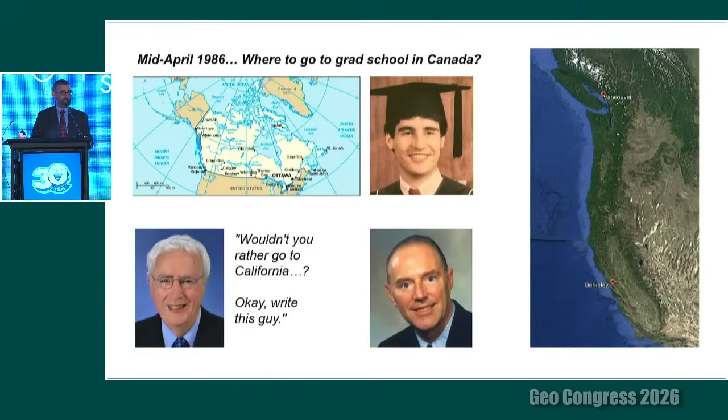He was a very inspiring teacher, and I was very thrilled to be able to start my PhD studies with him. Of course, his unfortunate passing meant that I was not able to finish my studies with him. But at the same time, I know that Professor Seed, through those 25 years of work with Ed, had a great influence on Ed's thinking and approach to life. And in the last 32 years, Ed has had a tremendous influence on me. So I think, at least indirectly, Professor Seed has influenced my career throughout my lifetime. And I'm very thankful for the opportunity to give this lecture in his name.

So with that, we'll get back to the talk. We're going to look at deformation modeling, in the context of risk analyses for dams. If we look at risk modeling for water or tailings dams around the world, you find a wide range in the complexity and maturity of the practices. In the US, we have pretty well-established guidance for water dams. Internationally, our guidance for tailings dams is more general. And if you look around the world in industry segments, there's a wide range from fairly semi-quantitative all through very rigorous frameworks. So we have to improve our practices in all these different ways.

Now, in any of these cases, if you're looking at a dam of significant consequence, we will end up doing nonlinear dynamic analyses, or NDAs, for the seismic part of the problem. The quality of that work depends on the site characterization, where we get our properties, our choice of input ground motions, which is the loading, the numerical methods and the constitutive models, that's the software we're going to use, and then how we use the software, the protocols for the numerical analysis and calibration of constitutive models. All of that depends on the expertise of the analyst and their resources, the amount of time they have to do their work, and the quality of the review processes.

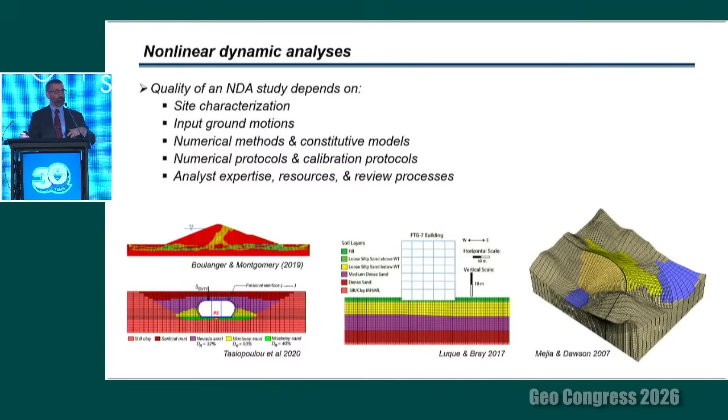We take those estimated responses, and we feed them into the risk analysis, and we have to track the uncertainties. So the uncertainties, we often break these down into two categories: the epistemic, or the reducible, in principle, uncertainties, and the aleatory, or irreducible, uncertainties.

And these are the uncertainties that we will generally evaluate through logic and event trees as part of a quantitative risk analysis, or a QRA, or at least parametrically to evaluate the significance of these uncertainties on performance.

But we also have to keep our eye out for errors. These errors fall in two categories. One category we could call ontological errors, where we've used inappropriate methodologies, relationships, or input models, and that's produced a bias that can throw us off quite substantially. Then there are human errors, the blunders, the bookkeeping, which are very easy to make with these complex analyses. It's the ontological and human errors we're trying to minimize through our QA and QC efforts.

In our experience, minimizing these errors is as important to the success of a project as tracking the aleatory and epistemic uncertainties. So you really have to track these, and we're going to talk about both.

In putting this talk together, my objective is to share a few lessons we have learned and the associated recommendations for improving our practice. These lessons and recommendations are targeted at everyone involved in the work, from the analyst through the managers, the regulators, the review boards, to the owners. So everyone plays a role in this.

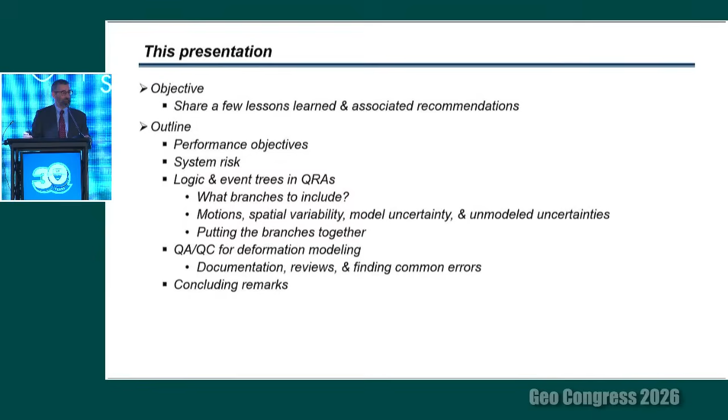So let's start first with some high-level comments and performance objectives. Now, performance objectives, we're always going to be concerned with life safety, but we're also going to be looking at economic impacts, operations, environmental, community, and reputational impacts, and these can all be very important for our owners or our clients.

One of the lessons from doing this work is that it's a really good idea to periodically revisit those performance criteria with your client or owner. The reason is the objectives aren't something you fix and leave. They depend on your costs and benefits, and they're going to change as you learn more about how the system is behaving. As you learn about the nature of the problem and the cost to achieve certain performance, revisiting with your client about what their real objectives are can help inform a more efficient execution of the risk study.

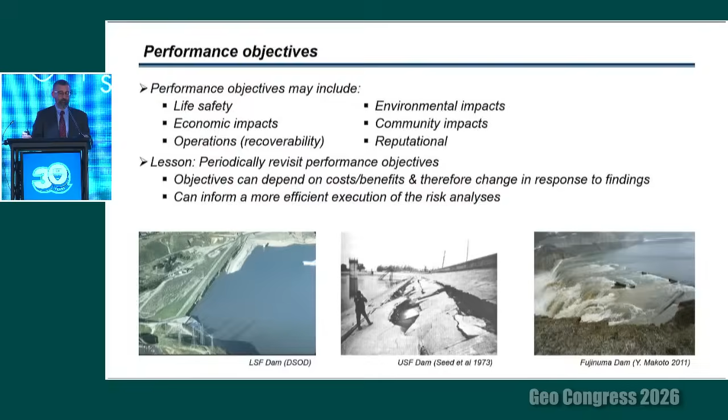In addition, you've got to always be thinking about this as a system risk, not just a seismic problem. When you look at the system, you need to think about the contributions to your risk from operational, hydrologic, and seismic loading. And you need to understand the interdependency of the components—how the embankment, the tower, the gates, the outlets, and the spillway interact and influence each other.

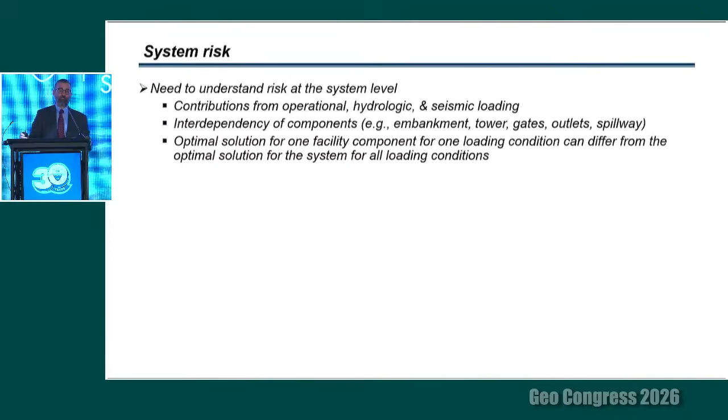The key takeaway here is realizing that the optimal solution for one component of the facility, for one of the loading conditions, is not necessarily going to be the optimal solution for the system to handle all the loading conditions. So you want to look at the system. There are a lot of examples of this.

A good one was the Army Corps' recent modification at Isabella Dam. In the end, having to deal with operational, hydrologic, and seismic loading issues, they ended up modifying both dams with raises and constructing a whole new spillway. The fix you arrive at is different than if you tried to fix any one component on its own.

So the lesson from these projects is that when you're doing a seismic study and you identify a deficiency, don't jump to designing a fix. Pause and re-examine operational and hydrologic risks, and make sure you know what your whole system is doing before you start spending money on further engineering studies.

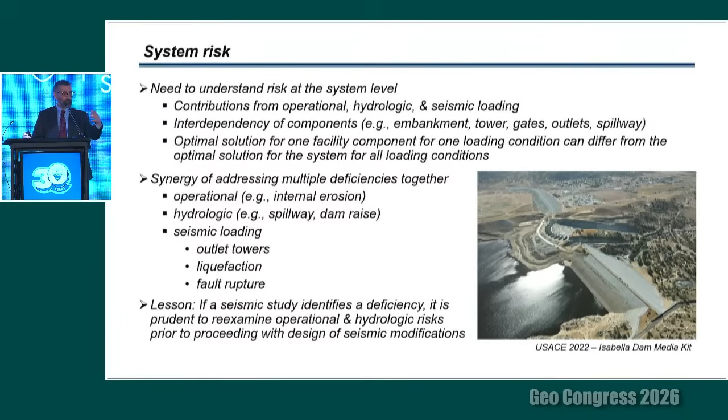So with those, we'll dive down now into logic and event trees for the QRAs. What branches are you going to include?

In particular, we're going to focus our talk on deformations, because it's deformations that we have to propagate down through the other branches for the failure modes, such as overtopping, cracking, internal erosion, concentrated leak erosion, damage to embedded structures, intervention, etc. So we're going to have to track the deformations and pass them down through the system.

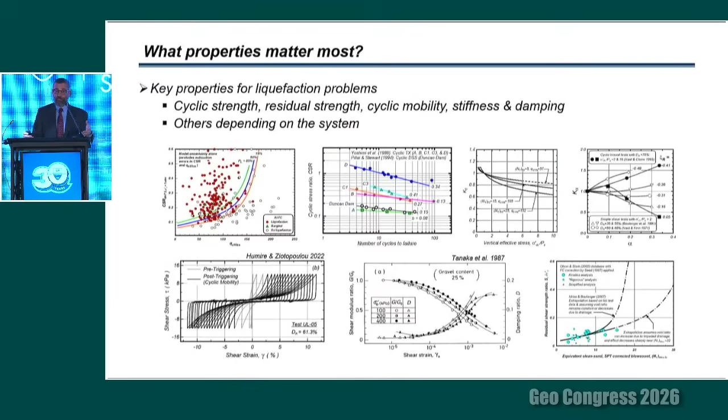Now, when we're looking at this, we're going to have to track the uncertainties, so we represent those in the risk analysis. And if we're looking at liquefaction, the question is, what are the key properties? Well, usually it's going to include cyclic strength, residual strength, cyclic mobility, stiffness, and damping. They're good candidates. It can be other things like reconsolidation strains or other aspects depending on the problem.

And that leads to candidates for your event tree, and you start putting these in. You've got ground motions. We often get our properties from penetration resistances, so you'll have uncertainty in those. And then those go into estimates for cyclic strength, residual strength, cyclic mobility, reconsolidation, etc. We have our stiffness, shear wave velocity, permeabilities, the numerical model, and then other factors.

And we're leaving a whole bunch of other factors uncovered. These include things like spatial coherence of the motion, drained strengths of the other materials in the embankment, cracking, localizations, mesh effects, 3D effects if you're only doing 2D models, the modeling procedures. So in fact, there's a lot of uncertainties, and the problem quickly gets intractable. So what we're really trying to do is identify the key ones, keep this a little simpler.

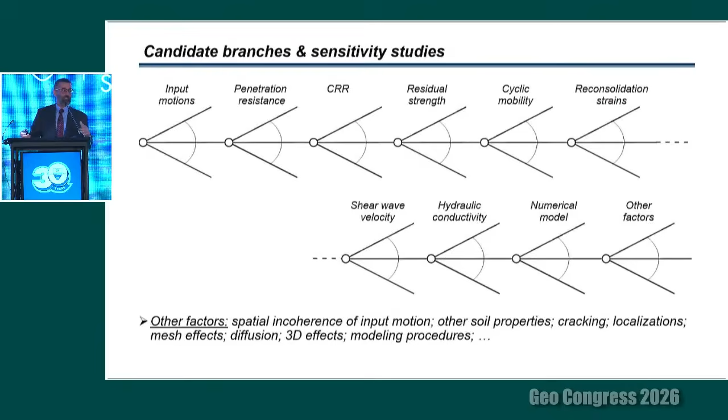And what you can get is at a certain level of shaking, you might trigger an instability, a large or essentially uncontrolled deformation. And we're going to have to treat those unstable cases separately from the stable ones. So you might track the fraction unstable and then have to have a model to predict deformations for the stable cases. So both of these are very important.

Time limits, we're going to focus only on the stable cases as an illustration of one of the things we have to deal with.

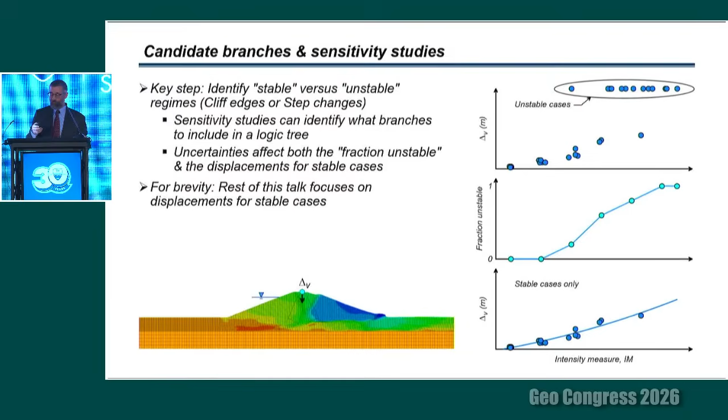Okay, so we're going to do this. Imagine that you've got a stable system, you've done the sensitivity, you know it's going to stay stable, but you do a sparse tree. And you'll see sparse trees in practice, where maybe you just do ground motions, maybe you look at penetration resistance, and maybe another property.

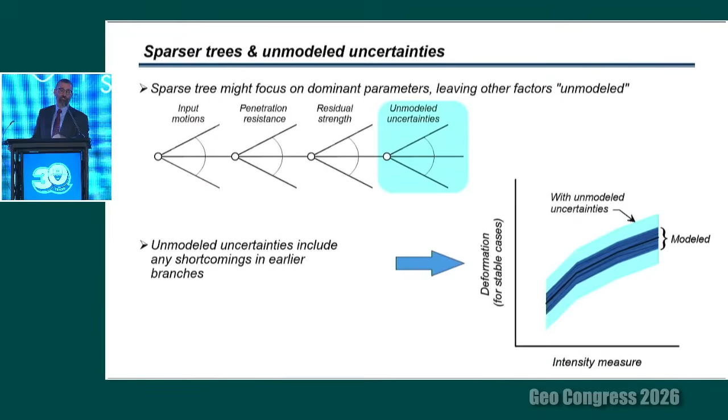And what that means is, schematically, you'll have an estimate of deformation versus intensity measure, and you've modeled some variability. The variability might not be that large. There's all those things we didn't model, the unmodeled uncertainties, and those unmodeled uncertainties can be large. They include all the things we talked about and the shortcomings in the earlier branches. If you add the unmodeled uncertainties, you're going to have greater variability, and that's going to result in greater risk. So that propagates down the line.

So maybe you do a little bit more work, you add some more parameters, you investigate them as part of this event tree, and you're going to have some unmodeled uncertainties at the end, but there'll be fewer of them.

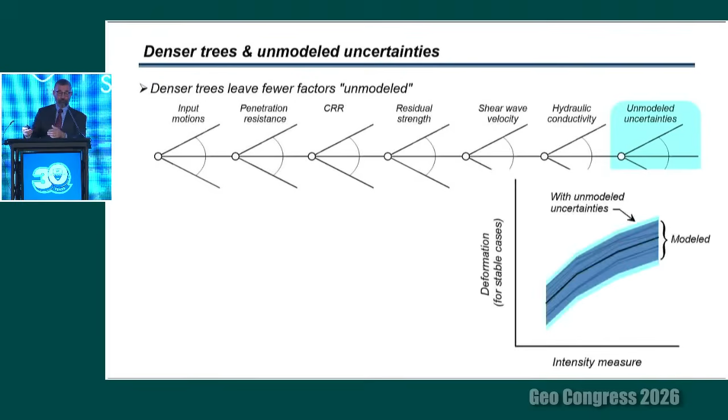That means if you look at your deformations, you'll have modeled greater variability. You have less unmodeled, which means when you add it, it doesn't widen you as much. But you're in an odd situation where if someone does additional work, they have more variability and greater risk, and you never really want to be in that situation. So we'd like to think about how you can estimate and account for unmodeled uncertainties.

Even if you're using sparse trees with different levels of rigor, what I'm going to do is walk through some of the key sources of uncertainty, get rough estimates of their contribution to the variability, then pull them back together at the end and talk about how we can make this more reasonable, even when using sparse trees.

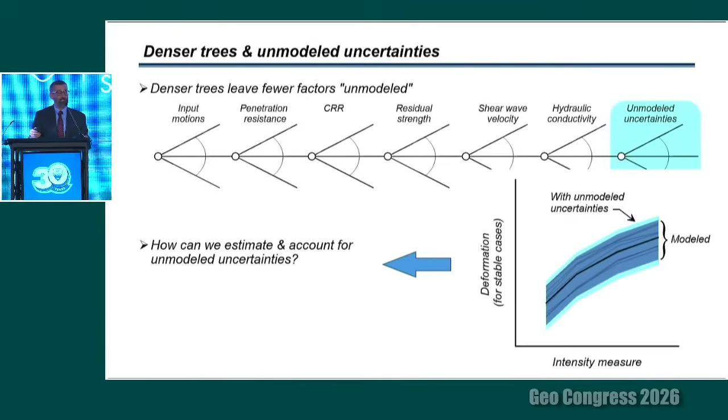Let's start with one of the big ones: earthquake acceleration time histories. The variability in dam deformations you get from just the ground motions depends on the dam, on what you're looking at, crest settlement or toe settlement, on how you pick the time histories, how you scale them, and how you modify them. The uncertainty in the mean response depends on how many of those motions you use, so there are a lot of different uncertainties to put together.

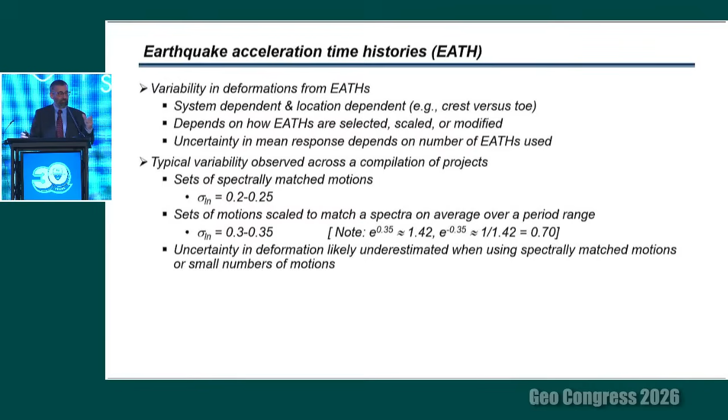If I go back and compile a set of projects performed by various people using generally good practices, sets of tightly spectrally matched motions give a standard deviation in log units of about 0.2 to 0.25. If instead they used sets of motions scaled to match a spectra on average, but where individual spectra include some variability, you get a higher standard deviation in displacements, maybe 0.3 to 0.35.

Recall these are in log units, so if you took the exponential of, say, 0.35, you'd get a factor of 1.42. This means that if you had a mean estimate of the displacement, then plus one standard deviation or minus one standard deviation just means multiply that by 1.42 or divide by 1.42.

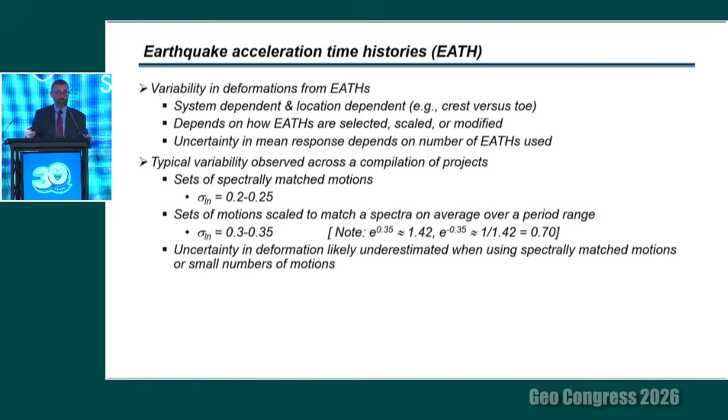The uncertainty in these deformations is therefore likely underestimated when using spectrally matched motions, which we can deal with, but just recognize that. Another big source of uncertainty is spatial variability in natural or constructed deposits, and you get a handle on this using various numerical analyses.

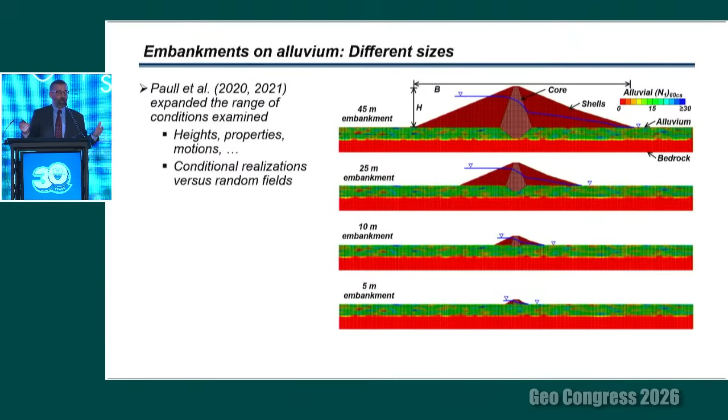This is an example of some work with Jack Montgomery a few years ago. You look at the response of a dam where you model stochastic variability in the properties, then turn around and model it with uniform properties based on some equivalent representative percentile, and compare them. That work was expanded by Nick Paull, where we used different height embankments, a wider range of properties, motions, etc. This figure is just one example of that kind of work.

Now if you change the scale of fluctuation to 60 meters, what embankment is small or big changes, and you have to deal with that. But this does lead to some simple rules of thumb that I'll point out from this slide.

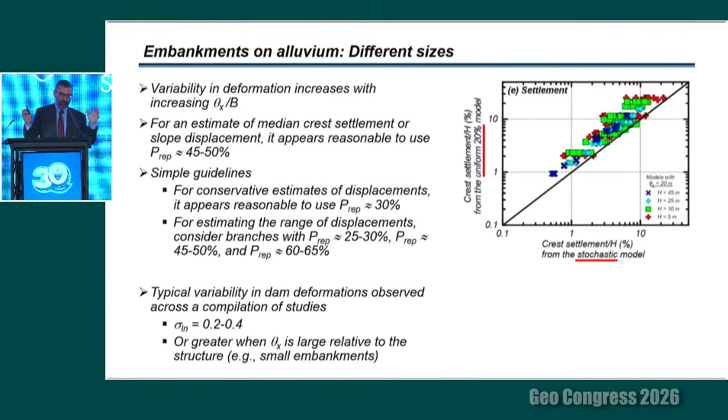If you go back and compile these types of studies, what you tend to see, typical values, is that the variability in displacements from spatial variability gives you a standard deviation of about 0.2 to 0.4. It can get larger if you have really small structures, small levees with big scales of fluctuation. That's a special case, but for dams we're usually looking at something like this range.

So these numbers start looking familiar, and we're going to add a couple more. The next one is model uncertainty. This term refers to just the numerical analysis model, the constitutive model, and the numerical platform. No model's perfect, right? Some are useful. So what's just the error due to picking between different platforms?

This shows that when people have done this, it's a good thing to do in practice, because it's not hard to swap out the two constitutive models, and it gives you a sense of how much it affects your results. When people have done this, typically you'll see standard deviations between them on the order of 0.2 to 0.3.

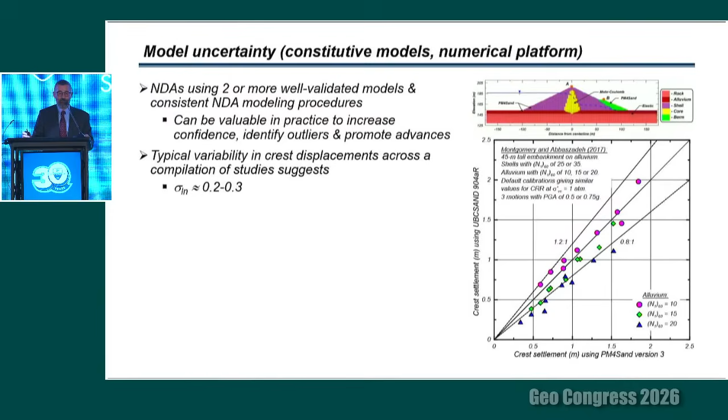Okay, so now, what have we left unmodeled? Well, that long list we talked about. We're not going to go through all of these other than to say we leave a lot of uncertainties on the table, and they're going to depend on the individual structure. One of the bullets is the applicability of a correlation for a challenging soil, a gravelly soil, a clayey sand. The more unusual your soil, the more uncertainty you're going to have.

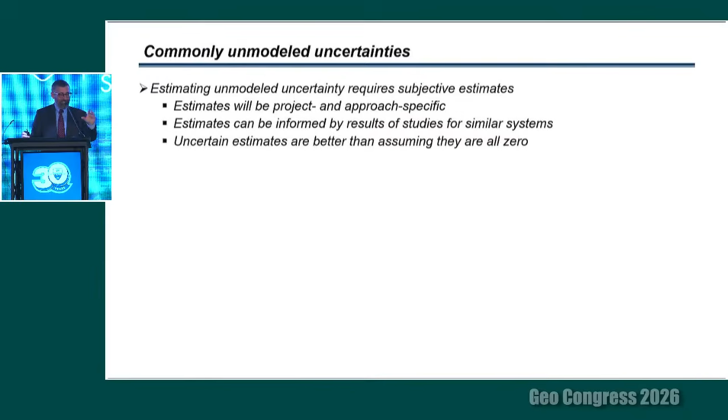3D effects might not be large for one dam, but might be more significant for another dam, so they depend on the facility. But they're not zero, so we're going to try to estimate these. It's going to require some subjectivity, and it's going to depend on the project. You can be informed by results of other people's studies, but I want to emphasize that an uncertain estimate of these is better than assuming they are zero. In fact, estimating them as zero is probably the worst estimate you could make. So we're not going to do that.

For discussion purposes, these are subjective estimates made for an embankment dam, with low, medium, and high standard deviations. The first bullet is the model uncertainty we just talked about, say 0.2 to 0.3. The other commonly unmodeled uncertainties are that big list we just went through, say 0.15 to 0.35. If you added those together, because most times we're not checking models, so those are all going to be unmodeled, you get something like 0.25 to 0.45.

I have to point out the way we're adding these is the usual square root of sum of the squares, which assumes these things are independent and uncorrelated, and that's not true. They will be correlated to some degree, and that will add some additional uncertainty. But it's still better to do anything other than zero. So we're somewhere in the range of 0.25 to 0.45.

Now we can pull all these pieces back together. As we pull them together, the first point to emphasize again is that you have to get the total uncertainty to be realistic, to propagate through the rest of the event tree, because all the other failure modes depend on those deformations. So we have to get realistic uncertainty to move through overtopping, piping, damage to structures, etc. If you use a sparse tree, you're going to underestimate the total uncertainty, and you are going to underestimate risk.

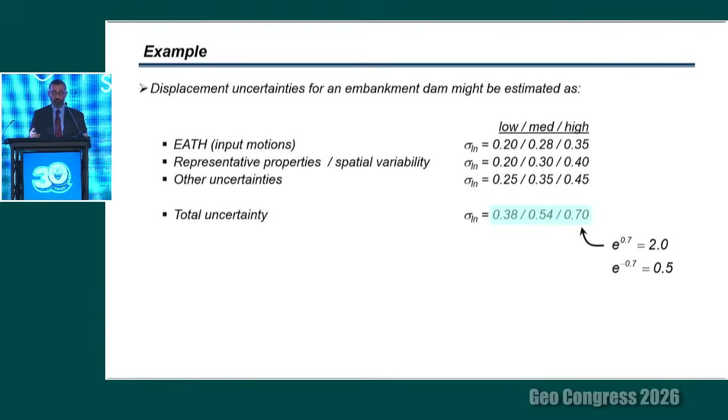If you take those typical numbers we talked about, all those unmodeled uncertainties can be large, and you haven't done the work, so you don't know what they are, so you've got to be cautious. You have uncertainty in the uncertainties. So you should use something a little on the high end, maybe 0.6. If you add that, you get a total uncertainty of, say, 0.66, and now we're close to that 0.7 we talked about. That starts to make a lot of sense.

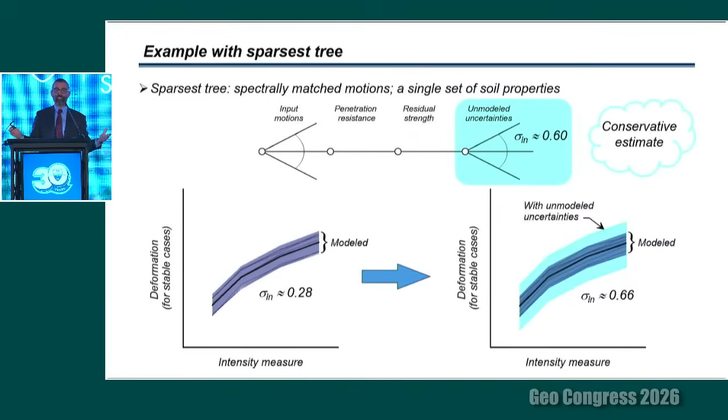So if you see anyone doing sparse trees getting something like 0.28, no one's that good, right? So you have to allow for some uncertainty that you've left on the table.

Now, if you do better work and dive in and examine more parameters, you're going to have more modeled uncertainty, like on the left, but you'll also have less unmodeled uncertainty. When you add the unmodeled uncertainty in this case, your total uncertainty can actually come down. Probably the bigger benefit is that you'll have better confidence in your understanding of the system and where the mean answer is—that's probably your best benefit. But you also get to a more reasonable place where doing more work should, if anything, reward you with bringing down your variability or uncertainty.

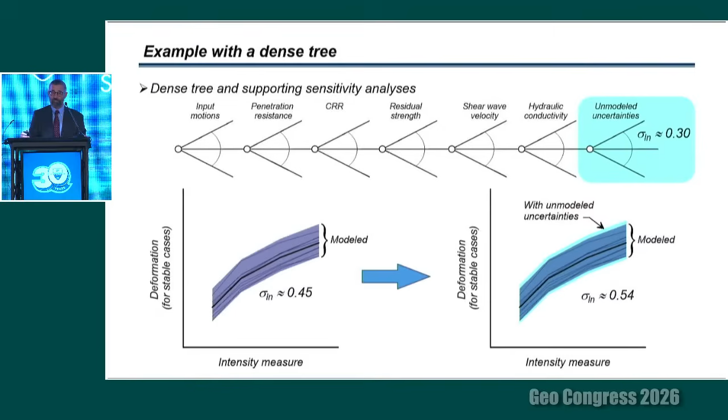So just wrapping that part up: a key step is to identify your stable versus unstable regimes, and you have to have done that through either sensitivity studies or pretty detailed branches. We'll handle those separately from stable cases. What we were talking about was estimating displacements for stable cases. You have to get the total uncertainty to be realistic, to get the risk reasonable.

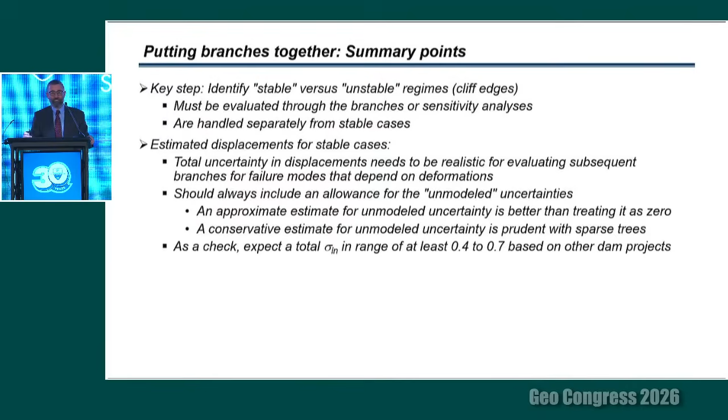I would argue that you should always include an allowance for unmodeled uncertainties. An approximate estimate for unmodeled uncertainty is better than estimating at zero, and a conservative estimate is prudent if you're trying to get away with sparse trees—that'll help us avoid rewarding people for doing the least amount of work. As a check, if you're the reviewer or the owner, your total sigma in displacements should be on the order of 0.4 to 0.7, based on dam projects where people have done the work. If you see anything smaller than that, they're missing something. Again, no one's that good.

Okay, so that was QRA analyses.

Now what we want to talk about is minimizing ontological and human errors. These are a concern because they're a very common problem in our profession.

The first problem is the unreviewable report. This is where the consultant writes the report and says, we did these FLAC models, here's the deformed shape, the answer is 3 meters. You can't review that, you can't tell if it's behaving reasonably or not. It's an unreviewable report. So you push back and say we need some figures, some intermediate results, show us these things. That leads to the second problem: the supplemental materials come back and now you start spotting significant errors. If you identify errors this late in the process and redo the work, you've screwed your budget and your schedule, and no one's happy. So this is not a good situation.

A third problem is variability in practices. This is where you get very different results from an analysis when you change your consultant. This happens if one consultant evaluates the issues and says you have a problem, you need to fix it, then the owner hires a second consultant to do the fix, and they build their own numerical model to design the fix and get wildly different answers. Now the nature of the problem and the nature of the fix has changed. You have to resolve that before you can go forward. Those problems are usually due to ontological or human errors, and you have to sort them out—again, no one's happy.

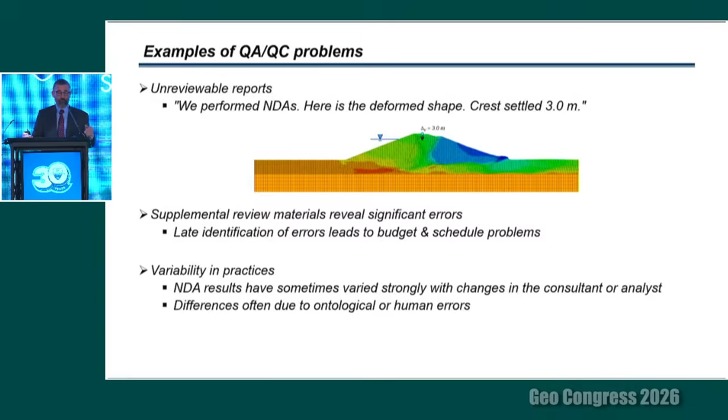So fixing these things early on is in everyone's interest. Mike Beaty and I wrote a paper about this about a decade ago, called a reviewer's checklist. We went through 12 things we were interested in looking at if you're going to be able to review a report. I'm not going to go through all of them. There's two things I want to focus on: comments on what we want to see for calibration of constitutive models, and what kind of results we want included for a particular baseline analysis case.

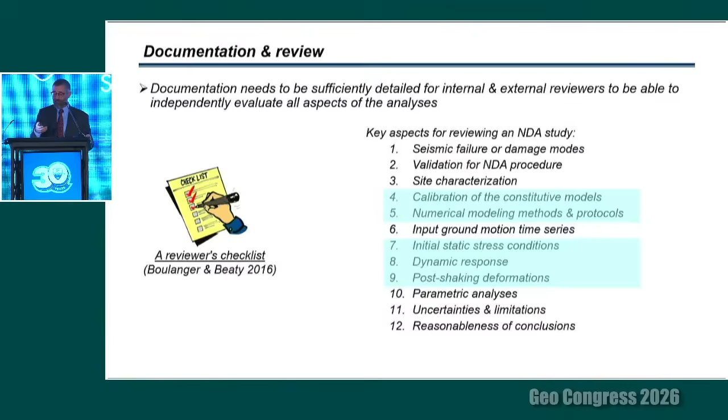We summarize those as a recommended standard set of plots we'd like to see. People often ask why we want all these plots—the reason is common errors will usually pop up on one or more of these figures, you just need to see them. If you get an engineering report from a firm that does really good work, you get all these figures and there's no problems, often because the analyst has already seen the figure and any obvious errors have been spotted and fixed. When you get a report and the figures aren't there, you can't independently check that everything's behaving well, and you aren't necessarily sure the analyst has actually checked everything. So you need to see the figures in the documentation.

As we go through this, I want to point out the reviewer doesn't have to explain what's wrong—the reviewer only needs to spot that something looks odd. If you spot something odd, it's the consultant's job to explain or fix it. You just have to learn how to spot odd.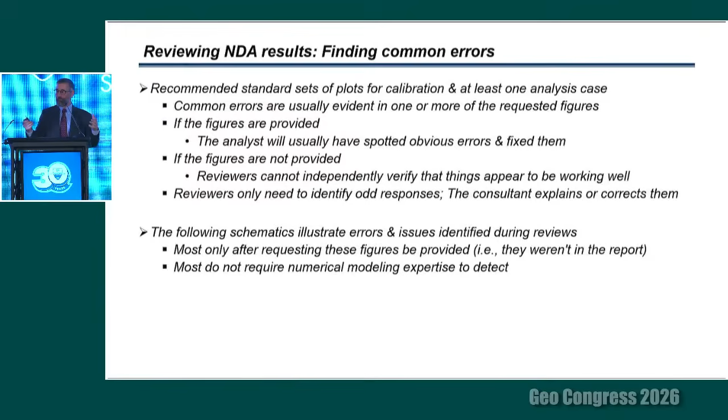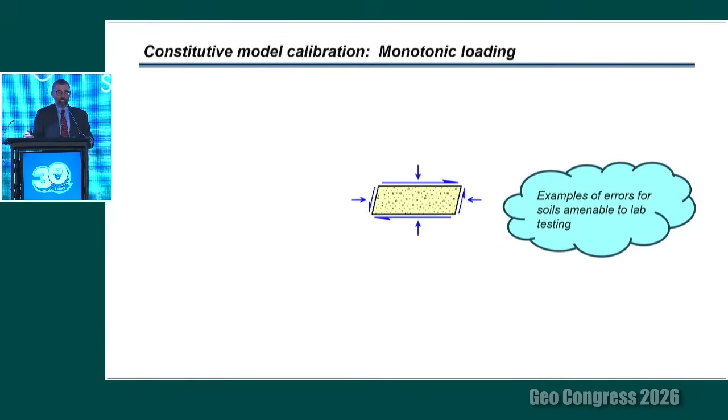We'll start with some figures on calibration of constitutive models. Suppose we have soils where we can do lab tests, like clayey silts and silty clays. The first thing people like to do is calibrate to the lab test, showing a calibration against a monotonic lab test. Turns out lab moduli are often lower than in situ moduli by factors as high as 2 or 3, so you'll underestimate the stiffness, and that affects your dynamic response.

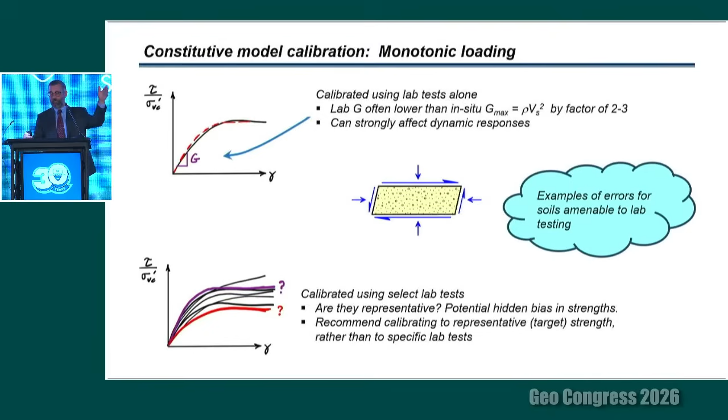So yeah, that's a flag. They show you a calibration to individual tests, but they don't show you whether the test is representative of the whole data set. So you've got to see where the other data are. Oh, they picked the lowest one, or they picked a very optimistic one. So how did you pick these tests?

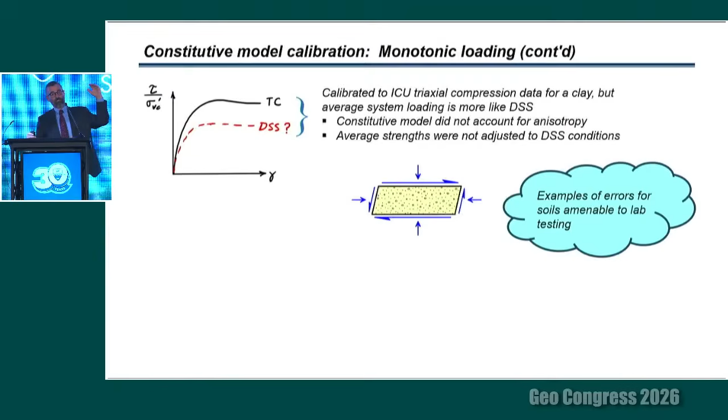Or they calibrate it to triaxial data, but it's a site where the dominant loading condition is more like simple shear. Well, if you're in a clay, silt, or sedimentary deposit, simple shear strengths are often about two-thirds of triaxial strengths. And many constitutive models, when calibrated to triaxial, will not predict the correct simple shear strength. They don't do anisotropy well. So you either get the consultant to show you the anisotropic modeling and prove it works, or they end up having to adjust the triaxial to simple shear and calibrate to that.

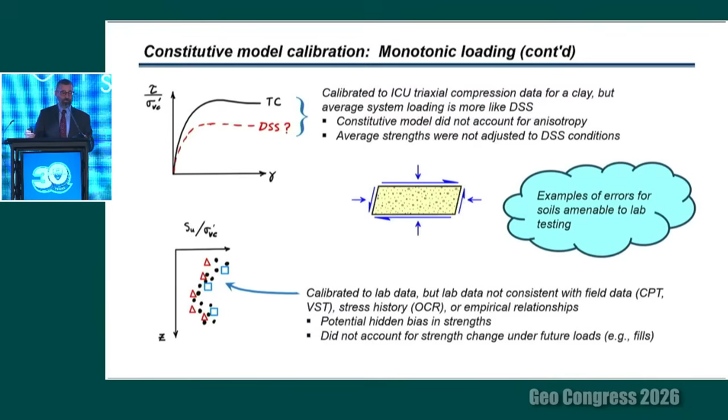If they've calibrated to lab data because the analyst is interested in that, you want to check: was it consistent with the other data, the field data, the CPT, the vane shears, the stress history, knowing the OCR of the deposits? You can have lab data that is biased high or low relative to field data, depending on how they reconsolidated and handled the samples in the lab. So checking that the lab data actually match the field as part of evaluating this calibration is important. It's also important for how they model strength gain under the weight of an embankment, and we'll do that one in a minute.

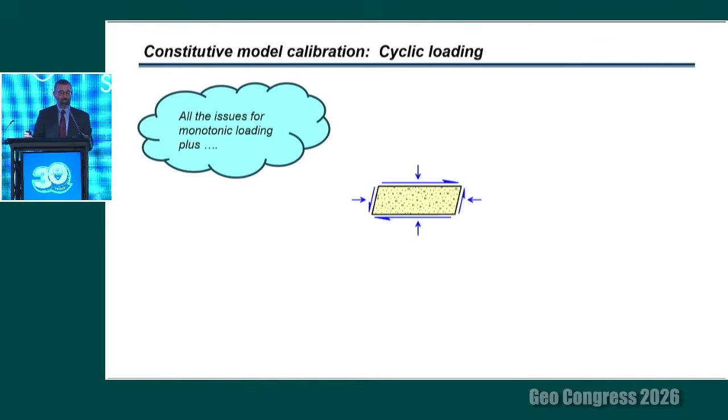Now, if we switch to cyclic loading, it's all those issues, plus maybe you've got to model this cyclic strength curve, and they're modeling triaxial data. Again, many constitutive models, if you calibrate to triaxial, will not predict simple shear strengths appropriately. So you have to demonstrate the model does, or you correct the triaxial to simple shear and calibrate to it. Another flag is that lab data are unidirectional. We know the field is multidirectional shaking, and we usually reduce these strengths 5 to 15% for the effects of multidirectional shaking, given we're often using 2D models, and that is often overlooked and missed.

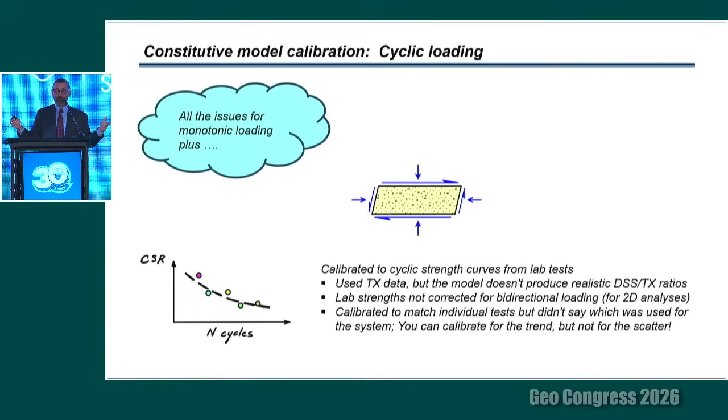You'll see people calibrating to individual lab tests. It looks great to compare them, but which test? You have variability in the results. Did you pick a weak test? Did you pick a strong test? You can't match them all; there's variability in the results. So it's better to pick the trend and calibrate to the trend.

Now, let's suppose you don't have lab data, so we're going to rely on field data. It's pretty common to use CPTs. We like the CPT, and maybe all the soils are calibrated to the cyclic strengths you get from a CPT-based triggering correlation. The problem is it plows through a clay layer, and if you apply these correlations to clays, you're going to greatly underestimate their strength. And that happens all the time.

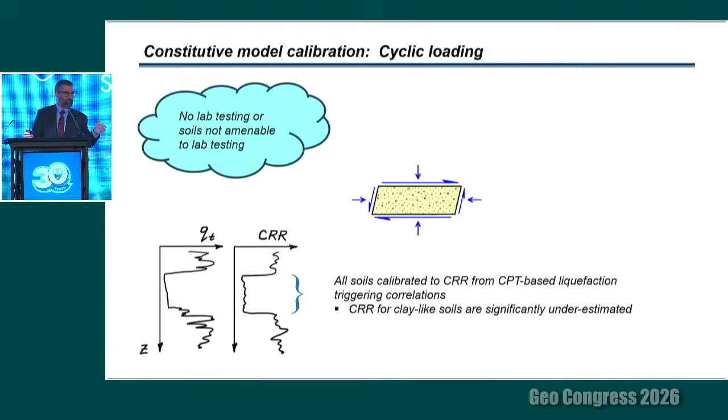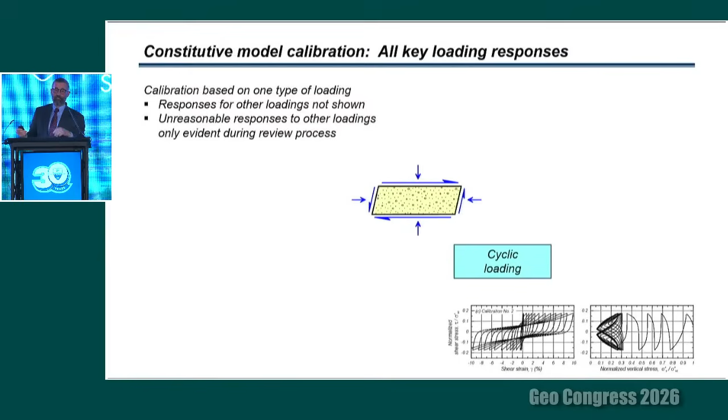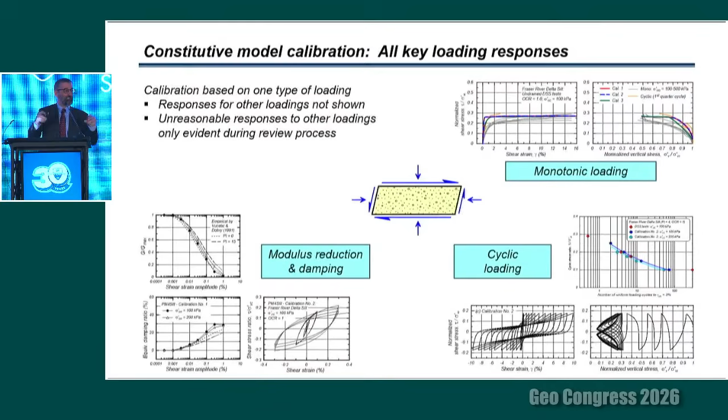Wrapping this part up, you might see someone do a calibration based on one type of loading. Look, here's my model, I get the cyclic response well. But you want to see the cyclic strength curve, you want to see the monotonic response, and you want to see the modulus reduction and damping responses. The bottom line is that if your model is calibrated to one of these loading paths, it doesn't mean it's going to do the other paths reasonably. In fact, it can do them quite poorly. That's why you need to show the calibrated model's response under all the loading paths to make sure you're getting reasonable responses.

Okay, that was the first part. Now we're going to switch and look at some typical results that come out of these analyses. I've got about 12 of these figures, basic figures that we ask for in any baseline analysis. I'll throw this figure on it. The figures aren't going to have errors in them, but they're the type of figure we would like to see. Then I'm going to flag the kind of errors that you can catch in reviews.

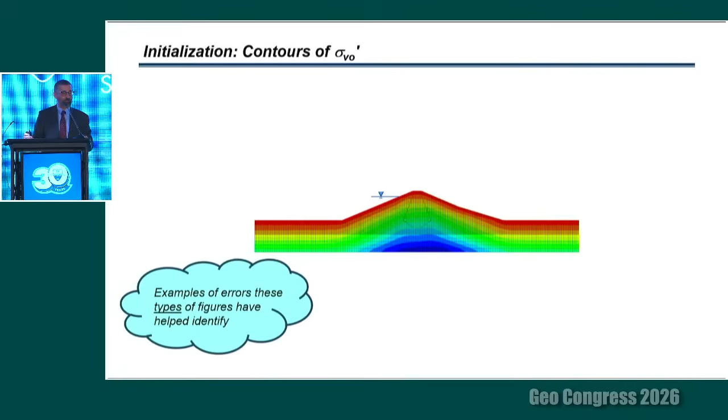So let's just start with basic contours of vertical effective stress. Underneath a reservoir at the ground surface, effective stress should be zero. Sometimes you get negative effective stresses, sometimes you get positive stresses that shouldn't be there. These are just bookkeeping errors in the input of the boundary pressure from the reservoir and the nodal pressure.

Easy bookkeeping mistakes are easy to catch. If you check the total vertical stress against the sum of unit weight times depth, and those stresses are much bigger—say 20-30% higher—a common error is that you've input the total unit weight for the soil, not the dry unit weight, not realizing the program will add the weight of the water in the pore space separately. You can catch it by checking these things.

We like to see pore pressure contours, which should match the reservoir on the upstream side. If you thought you had a drained shell, you should expect low pore pressures. Sometimes you'll see really high negative pressures just from improper boundary conditions, getting saturation and suction higher than they should be. You can get odd pressures along boundaries if the boundary conditions aren't done right. You just want to see something that smoothly varies.

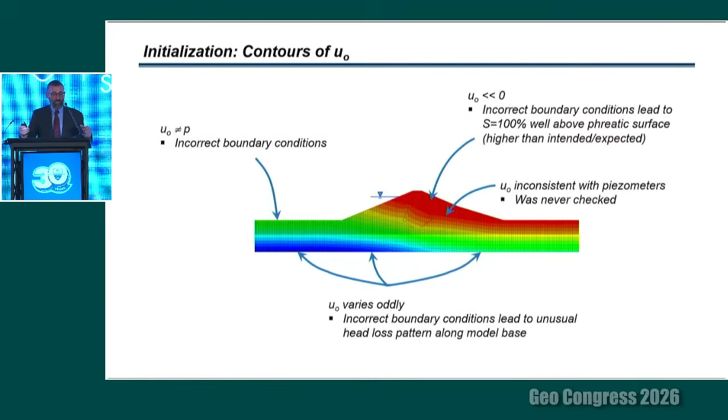You should always be checking against piezometers for an existing structure. It's not uncommon to find the seepage models don't match the piezometer data, and you have to have had that check—a reality check. So that's an easy check.

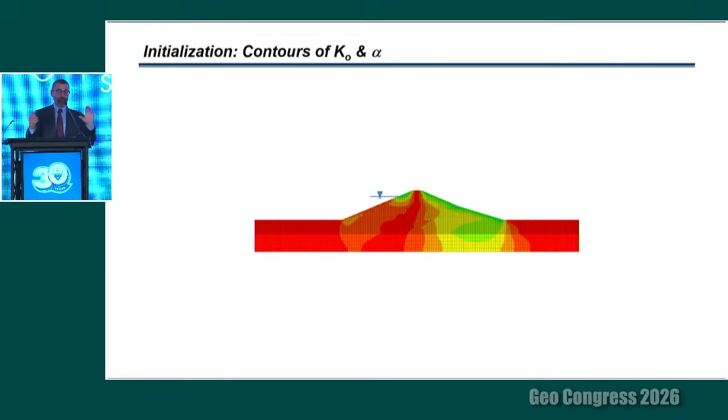We like to see contours of K0, the initial static stress ratio. K0 is the ratio of horizontal to vertical effective stress. We don't want plots of horizontal stress and plots of vertical stress separately; we want the ratio, because it'll stand out. You'll see K0 values of like 10 on a downstream shell on the face. You'll see really low values like 0.1 in a core. You'll see values like -10 underneath the reservoir.

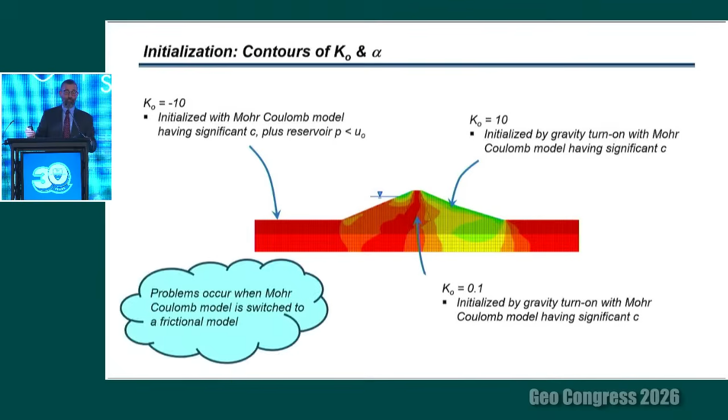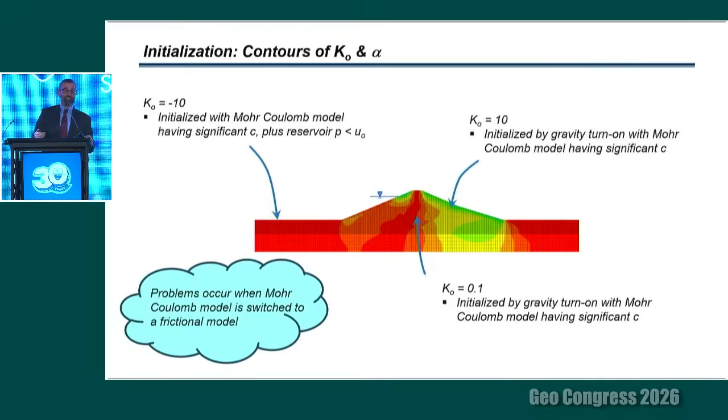These are all examples where stresses were initialized using gravity turn-on with Mohr-Coulomb models that had cohesion, which can produce these unrealistic K0 values. Any granular material after drainage and a little creep is going to have K0 values between something like 0.33 and 3, and anything outside that range is a problem, because the next step is you insert the PM4Sand or UBCSand model, and you'll be starting with the state of stress outside the bounding surface—it's immediately unstable. You can see that when you look at acceleration time histories.

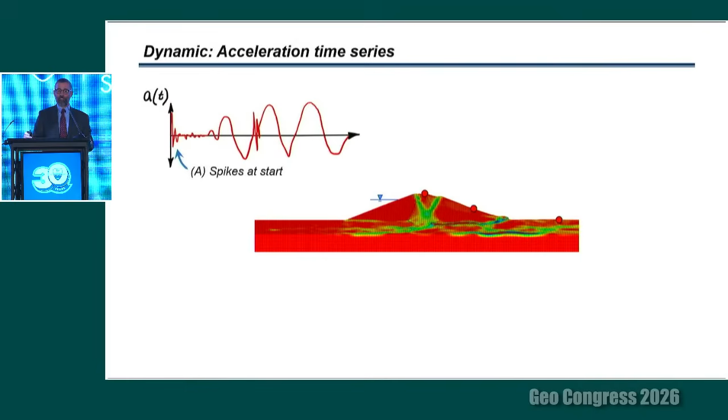If you pick out some select points, maybe right at the beginning you see some big spikes—well, they shouldn't be there, you haven't started shaking it yet. Those spikes in acceleration can come from starting the model with K0 values that were outside the yielding or bounding surfaces, which then had to jostle to get back into equilibrium.

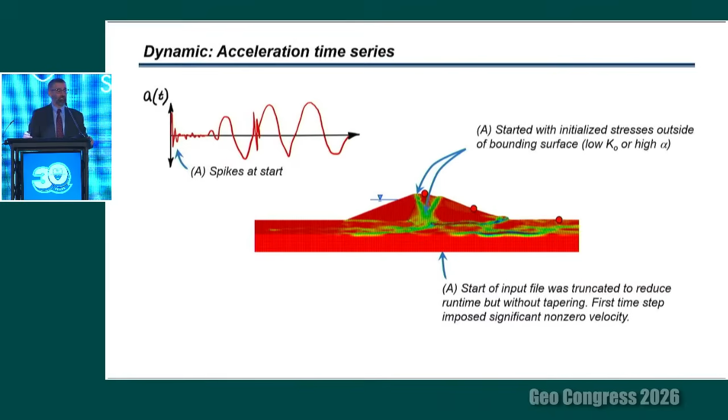Easy fix. It can also be that somebody wanted to shorten the runtime, so they truncated the input file without tapering it, meaning the first input point had a non-zero velocity, sending a pulse up through the system. You can see big acceleration spikes during shaking.

This is usually the user intervening in the analysis to do something, and hasn't told you about it. One example is the base is on a compliant base, and those dashpots will allow the base to bend in space. If the base bends significantly, they'll sometimes adjust the stresses to unbend it, and if you do that sharply, you get a big spike of accelerations through the system.

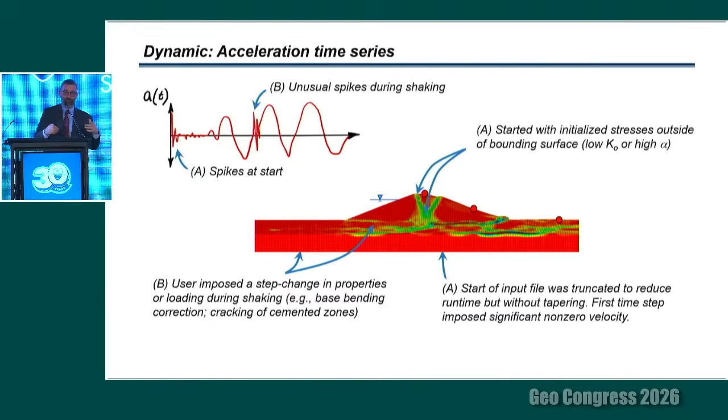Or you might have been looking at soil cement treatments, and you ask, what happens if I crack it at this time? Now, none of these are particularly a problem, as long as you know what they are, recognize them, and can adjust them so you don't cause such a shock in the system.

We like to see displacement time histories, because sometimes they don't stop moving. This can be, again, an example of truncating the input motion at the base and not allowing enough time for the system to come to rest. It can be because the analysis stopped too soon due to mesh entanglement. You could have a local instability, so the thing is actually unstable and keeps moving longer than you wanted. It could be pore pressures diffusing, if you're modeling pore pressure diffusion and getting strains associated with that. All of those can contribute to why you're seeing movements continue, and you need to get past that to when things stop moving.

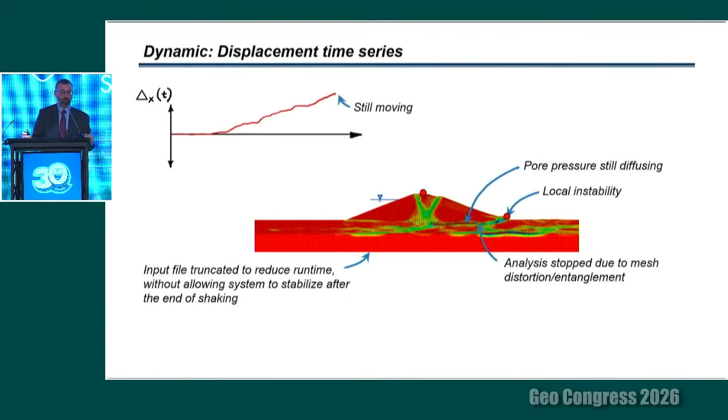So maybe you fix that and you've got displacements running out in time, and point A there has come to a stable value. You should always say, please show the base, because sometimes the base doesn't go back to zero.

Again, this is often not baseline-corrected motions showing up yet again, and that's why we like to see displacements plotted relative to the base.

We ask for response spectra. Easy example: the red spectra is for the motion at the crest, the black line is your outcrop motion. You can look at where the spectral ordinates are amplified the most, and that's an approximate estimate of the fundamental period of the system. If that fundamental period is bigger than expected based on simple rules of thumb, that can be because your system is too soft.

The moduli are small. This could be real, from very nonlinear responses, or it could be a bookkeeping error where somebody's put in the wrong number and you've got overly soft or overly weak materials. An example would be moduli based on lab tests rather than in situ shear wave velocities.

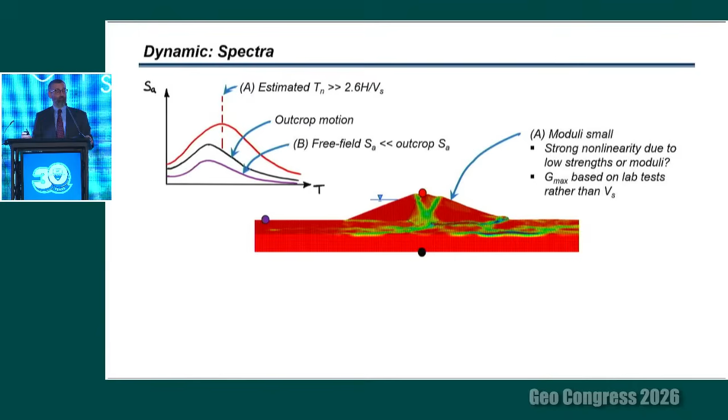You compare a free field point and see how it varies from your target outcrop. It could have been a lot lower - was the input motion input correctly? It's a compliant base, you had to double the stress at the base. They forgot to, or they did the deconvolution incorrectly.

It can also be that the free field is actually de-amplifying the motions. That could be realistic, but it could also be a sign of a bookkeeping error where the strengths or moduli got put in too low. So you just got to explain this to me.

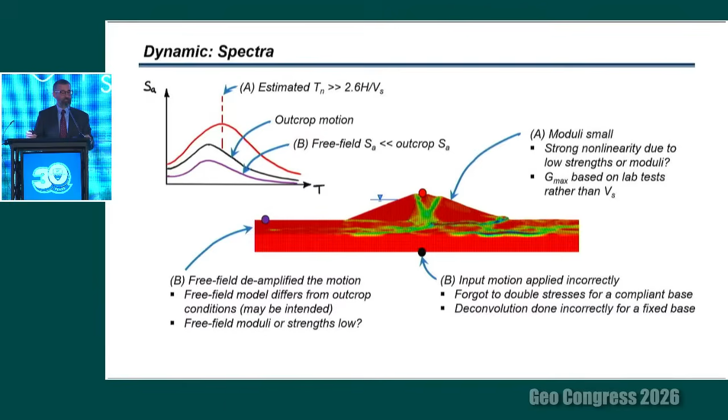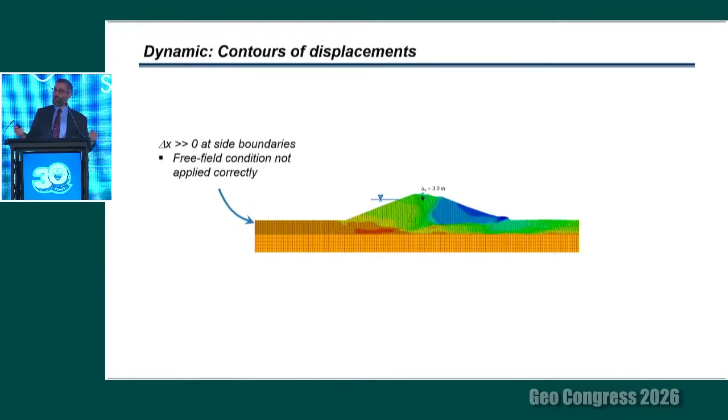We want to see contours of displacement. Displacements at the lateral boundary should be zero, and you'll sometimes see them just flop out to the side - that's a sign the boundary conditions weren't applied correctly.

You'll see base displacements not coming back to zero everywhere along the base, and that could again be non-baseline-corrected motions. It can also be if the bedrock layer was modeled relatively thin and isn't really stiff bedrock, you can actually stretch the bedrock. That's something you can fix by just modeling more rock - an easy fix.

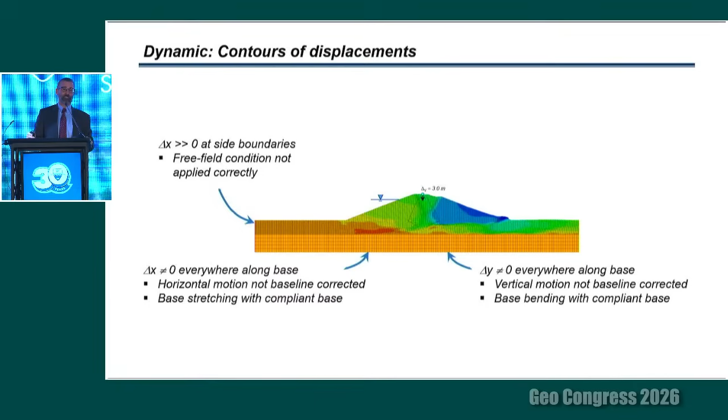You'll see that in vertical displacements as well. You'd expect them to all come back to zero, but the models can bend in space, and if they're bending too much, you have to model more of the bedrock to suppress that.

Two other issues come up where displacements are dominated by shallow slip. Shallow slip, surface raveling, is real, but sometimes it's accentuated too strongly. One way it can be over-accentuated is if you had shells that were more sandy materials and you didn't account for how the friction angle increases as confining stresses get smaller.

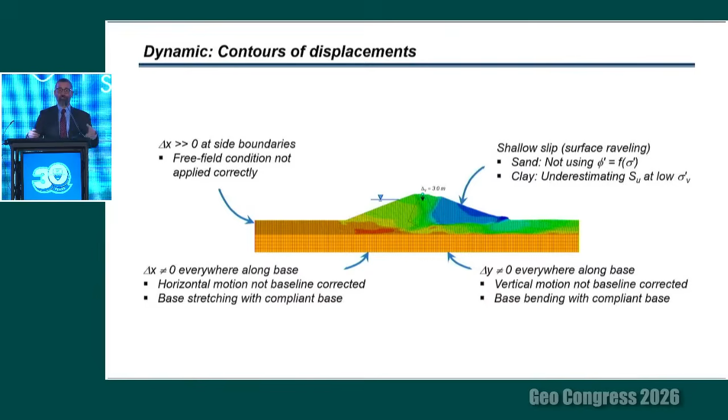The same thing applies if you have clay shells. If you decided to model the shell using strength ratios that imply zero strength at the surface, you can over-accentuate shallow slips in those materials as well. Easy things to spot and fix.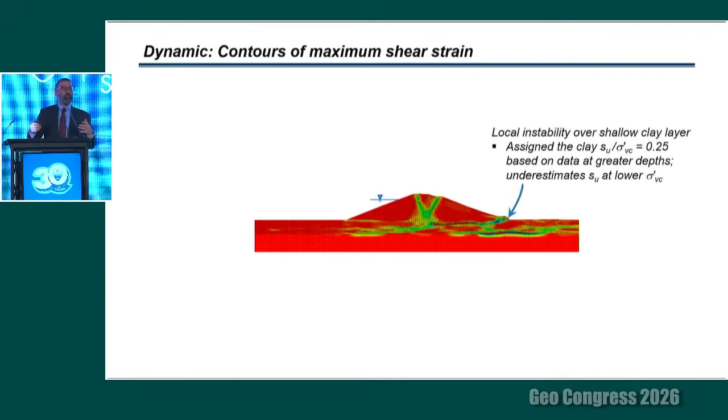The clay layer is characterized as normally consolidated, with an undrained strength ratio of 0.25, applied for simplicity to the whole clay layer. What that implies is zero strength at the surface, and the embankment has a very weak material right out past the toe. Normally you're going to have a crust that's stronger, and you want to include that in the model to avoid accentuating deformations near the toe.

The other side of this coin is seeing large concentrated shear strains at depth across the whole mesh. This can happen where undrained strengths were measured at the toe, and that undrained strength was assumed to apply across all elevations underneath the dam. But if it's a normally consolidated clay, the clay will gain strength under the weight of the dam. With this approach, you'll underestimate the strength and produce weak strength ratios and an unrealistic base isolation.

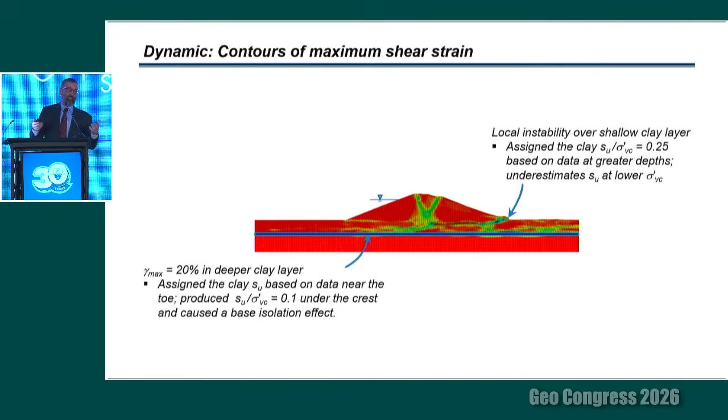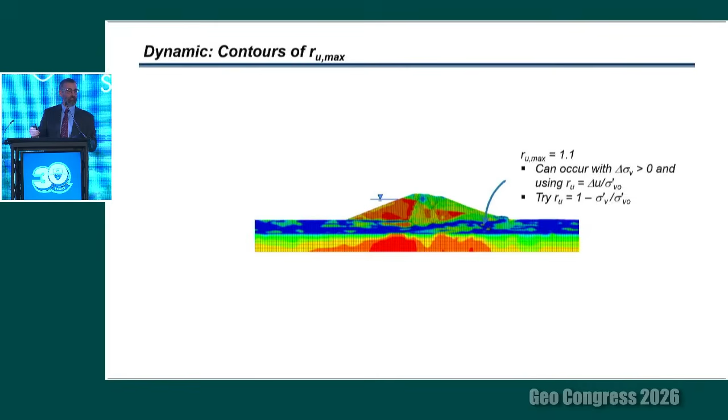We like pore water pressures. RU max is most common, so we just want to start there. With RU max, you might see values like 1.1. This kind of surprises you. And then you'll see other values, say 0.8, but you got large strains, and thought you needed 1 to get liquefaction. Neither of these are problems, they're just issues in communication. The first one, RU max can be bigger than 1 if you have fluctuations in total vertical stress.

The easy way to get around that is to change the definition to 1 minus sigma V prime over sigma V naught prime, and now RU will never get over 1, and it's easier for communication of what RU of 1 means. The other side, the RU of 0.8 is no problem. If you don't get stress reversals, you can accumulate strains and cyclic mobility in one direction, so there's no problem.

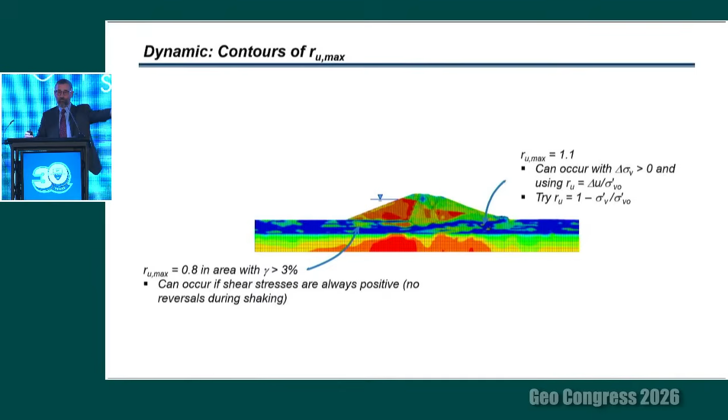These we just need because we're going to compare them to RU values, and RU values in particular, say at the end of shaking. On the downslope side, maybe after shaking, if the system's stable, RU will come back under 1, because if it's carrying a shear stress, it's going to need some effective stress to carry it.

What you're looking for is problems like on the other side, where the pore water pressures are negative. This can be quite realistic. This can just be that other parts of the foundation have softened, stress is transferred to the zone, and the zone is dilative, so it's dilating and taking up that shear stress.

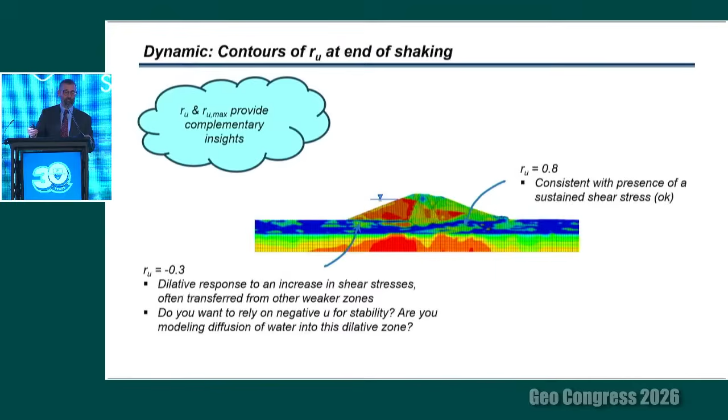The problem is, if you're not modeling diffusion, you need to account for the fact that water from the reservoir will diffuse into those depths. These are the shallower depths, so it'll diffuse quicker, and you'll lose that negative effective stress, so you don't want to rely on that for stability. Normally this is something we would fix, so we're not relying on suction to hold ourselves up.

Stress strain and stress paths for a few key points. You can tell why people don't like all these plots, but I'll tell you, they're worth it. You want to see stress ratios versus strain, and you look at these to quickly see how many cycles and what's the amplitude of stress to trigger strains. Are these what I expected for these materials? It's not a great check, but it'll spot bookkeeping errors.

You can see unusual stress paths where there's a strong dilation pulse and the stress path moves to higher effective stress and then never loses it again. This can be a numerical desaturation of the element when you exceed the tensile limit of the water, and it's something that's easily fixed and spottable.

Or you'll see strains accumulating unreasonably quickly at really low cyclic stresses, or illogically, like going in the wrong direction. Both of these can be incorrect property assignments, and actually both of them are constitutive model limitations that people found, and the models had to fix or recognize them.

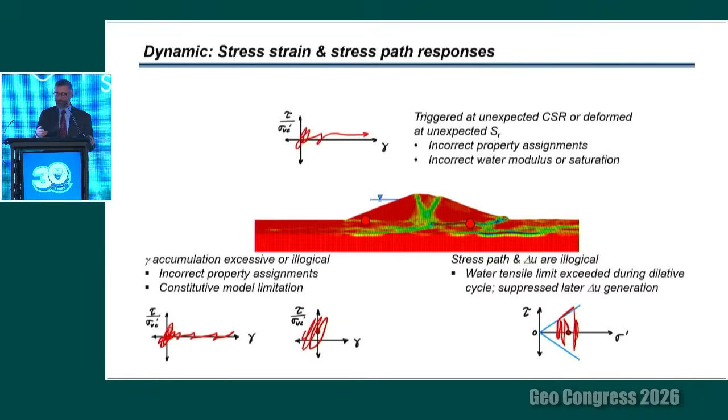Okay, so that was my list, and we're getting close to the end here. The point on this is if you get this documentation and you just get these standard figures, it increases the chance the analyst will have looked at them and will have spotted their own mistakes, and that's important. It facilitates the ability for the reviewers, the supervisors, the boards, the owners, the regulators to look at these figures themselves and be comfortable, verified that this thing looks to be behaving properly.

It also provides value to the client. The client is likely going to have to revisit these facilities in another 5-year cycle or another 10-year cycle, and having these results in the report provides value to that client in the future, so they deserve it. In addition, the review processes are really important for minimizing ontological errors, the choices of inappropriate relationships, as well as spotting these errors.

Okay, now you finish all this, and you got your risk analysis. What you really want to do now is do the sniff test of whether or not this all makes sense, the robustness of this work. You want to question a couple things in particular. The first one is the modeling procedures.

You want to look at, are they documented? Are they reflective of good practices? Or is this something that's dependent on rather opaque work, probably done by an individual in the back room of some office? You don't like that.

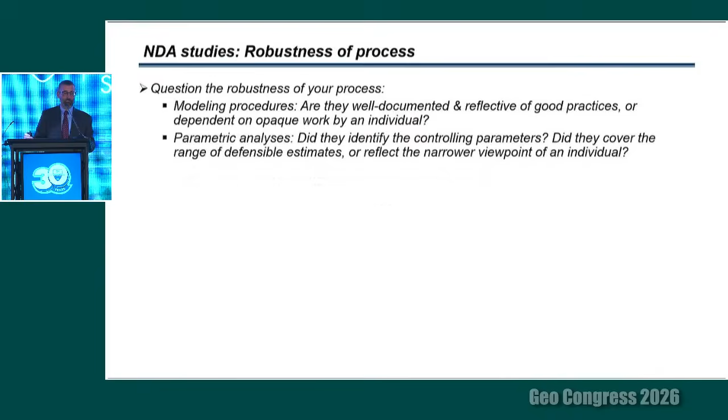Now, if your client is going to be looking at spending tens to hundreds of millions of dollars fixing these facilities, they want to make sure that their decisions are not going to be changed by changing one person or one consultant.

They want it to be a robust outcome. If you have any doubts, two things. One is you can do an independent review of the NDA modeling procedures, and this has proven really valuable on another project. Just taking one baseline case, having one person independently wade through the file front to back. What it promotes is good sharing of best practices in the community, spotting of errors.

It's an easy thing and it gives everyone more confidence that those errors aren't creeping in. The second one can come up when the response is really dependent on something that's not really well understood in our community. So you can consider engaging a larger group in an expert elicitation for controlling parameters where we're not quite sure what we're doing as a profession, because you don't want it to be driven by one person's preference or point of view. You want the owner to know, is this a robust decision? I've seen this change projects pretty dramatically, and it's worth keeping in mind if you're on the consumer end of these reports.

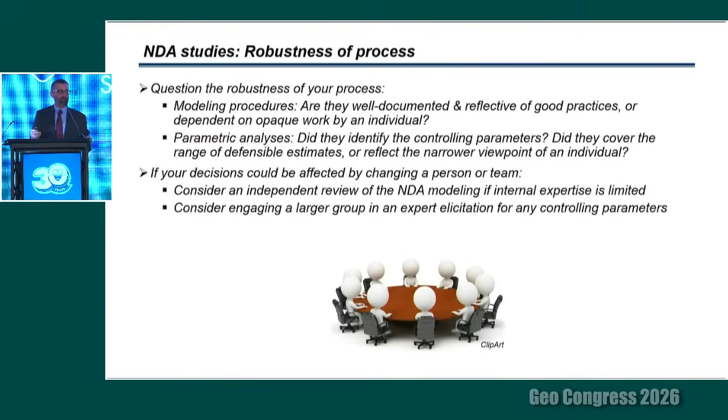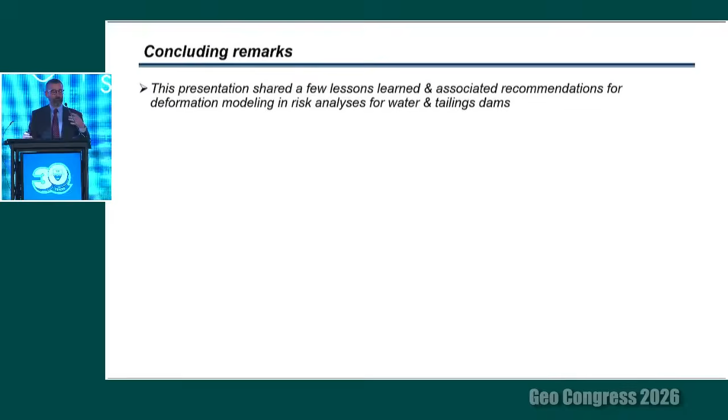Okay, we're almost to the end. Conclusions, I got one slide for this. What I was trying to do today, have a little fun, wanted to share a few lessons learned and some recommendations for how we can do a better job in this type of work, deformation modeling, part of risk analyses for water and tailings dams.

At a high level, I just want to remind you, keep looking back at the performance objectives. They're not a set it and forget it problem. Keep reevaluating as you learn more about how the system behaves, and always be thinking about risk at the system level. Don't dive into a design on a seismic fix right away without understanding if there are other problems that need to be fixed at the same time.

In terms of logic and event trees, this is where we account for the epistemic and aleatory uncertainties in the usual properties and loadings that we talk about. The branches and the sensitivity analyses have to be sufficient to identify if we have any unstable regimes. We need to know if there's any cliff edges. They are very important for assessing risks. So even though we didn't talk about that a lot, that's a key step.

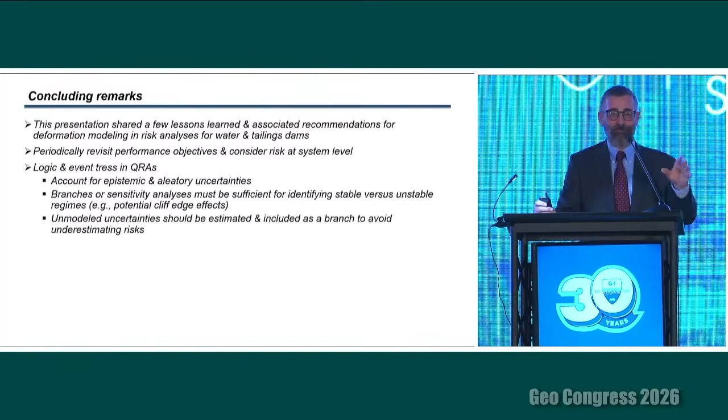The unmodeled uncertainties, though, need to be estimated and included as a branch to avoid underestimating risk, particularly when we're using too sparse of a tree. I think it's pretty easy to estimate some of these numbers, and an approximate estimate is better than ignoring it.

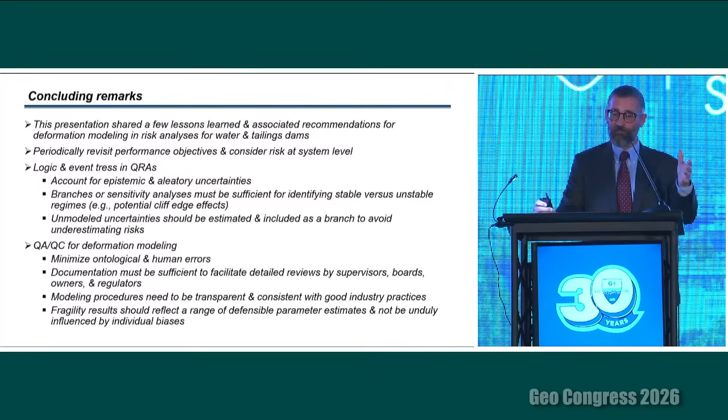We then switched, had a little fun looking at QA/QC for deformation modeling, the ontological and human errors, examples of why you want the detailed documentation so that you can look for yourself to see if everything looks good or is there anything odd. Just show me.

Last two points: the modeling procedures, you want them to be transparent and well documented, and they should be consistent with good industry practices. And the fragility results should reflect a range of defensible parameter estimates and not be unduly influenced by any one individual's biases.

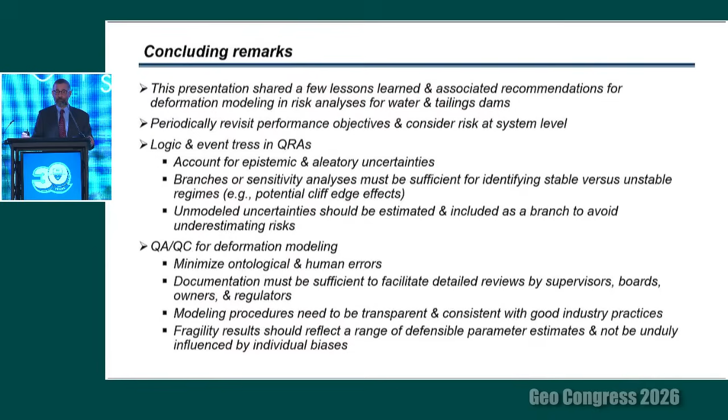Okay, then I got a couple acknowledgments. When you put these types of presentations together, there's a lot of influences that go into it, and probably more people than I'm going to list here. But I presented draws on work and discussions with a number of people, including a number of former students, and I would have to specifically call out Jack, Nick, Patrick, Sean, and Chris as all having contributed in parts of these studies. Of course, my colleagues who I've worked with closely in dealing with these problems, and parts of these problems, including Ed and Bruce and Jason and Katarina.

It's friends and consultants who I've had the pleasure to work with on many projects, and so we've had chances to talk through many of these issues. I mentioned Mike, Rambod, Marty, Tom Less, and Lelio in particular. But it's really all the clients, and it's all the fellow board members that I've worked with, and all the consultants and all the regulators, because really you learn from everybody on these projects. And so this just reflects, I think, a lot of input from a lot of people who I can't even remember to list.

Last, I want to thank and acknowledge Harry Seed for accepting my late application, lending me money, inspiring me to pursue a PhD, and starting me on this path. And it really is an honor to be able to give a lecture in his name. Thank you.